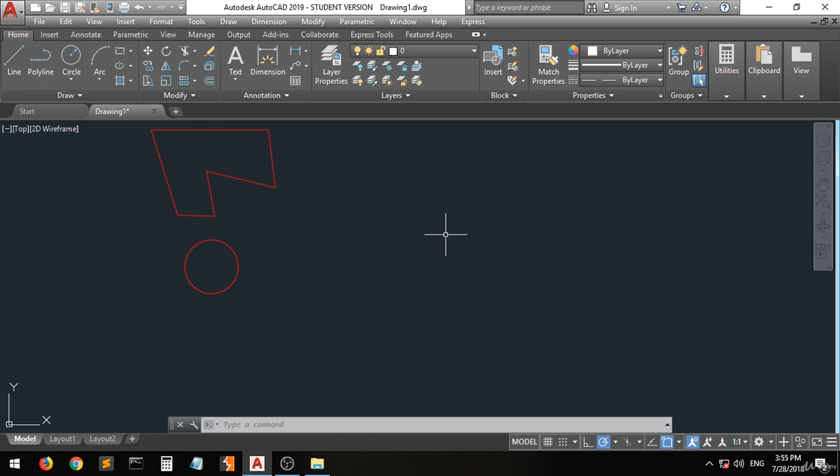So when you create any object, it is drawn with the properties of the current layer. And when you move to, for example, drawing and then create anything, you can see it is created with the properties of the drawing layer.

Let's assume we want to change this circle from this layer to layer 0. What to do? Just select this circle, move here, and select layer 0. And now see, it is moved from the drawing layer to the 0 layer.

See, when you point at this circle, you can see that the layer is 0. When you point at this object, it is in the layer drawing. Very easy. Now let's assume you have this detailed drawing, and you

want to modify some small things on this drawing, and this circle is confusing you and making the job hard, and you want to hide this object. What to do? You have to go to the freeze option. So objects on frozen layers are invisible.

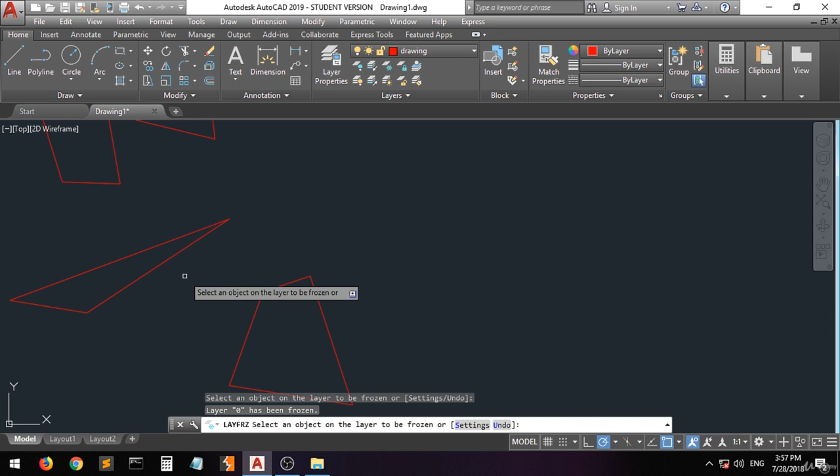And then once you are done, you go to the freeze option, and underneath it you can see thaw all layers, and all the layers that were previously frozen will be unfrozen. Click on it and see all the objects of the frozen layer are now visible for you.

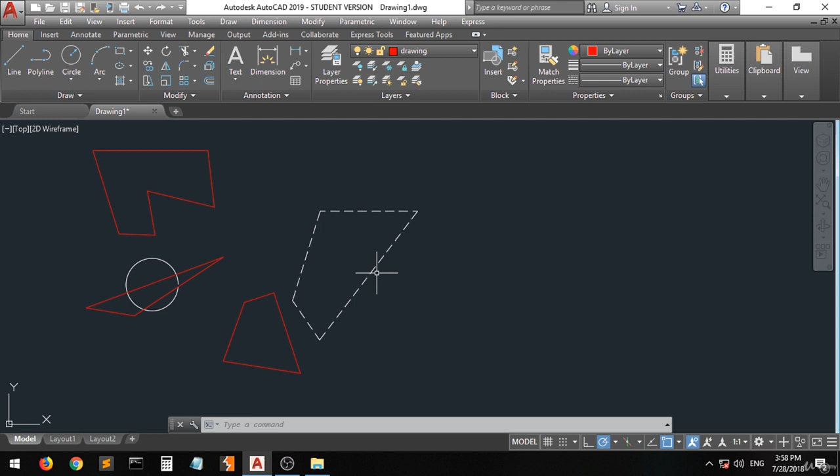Let's say you want to work on small details of this circle, not the other things on this layer. You go to something called isolate. Okay, so once you isolate an object,

you can see that all the drawings of other layers will be hidden. But the one you have chosen will be the only one shown for you. Let's now move it back to the other option, the unisolate. This is the isolate, this is the unisolate.

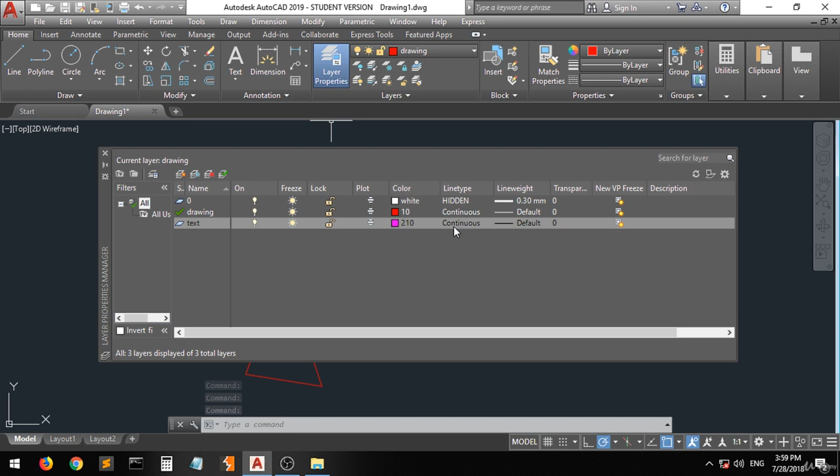Let's create another layer from here, as we said. Go to new. Let's put the text, enter. Let's change the linetype for this. I don't want it to be continuous, so let's make it not continuous. Okay, now we're done. Go to close.

Let's go to the text and create a single line here. Specify start point, the height, let it be in this direction. Now let's just put a circle, double enter as we say, and let's move it from this point here.

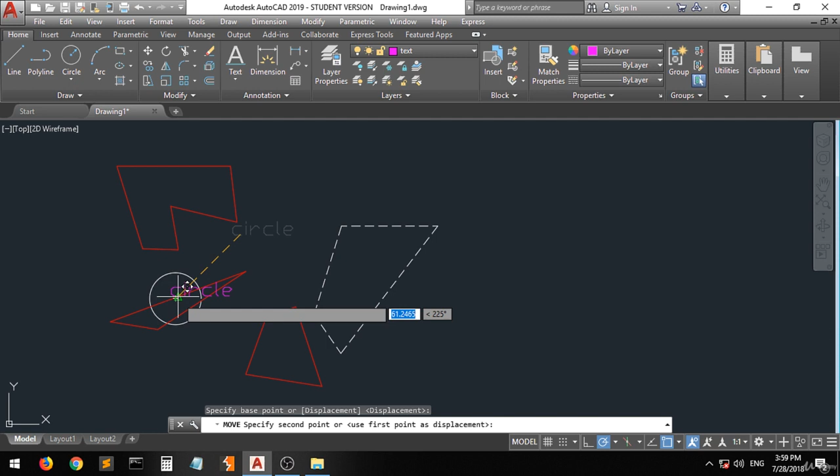Now, once you have complicated drawings like this, you want to work on this circle alone. There's a lot of intersection and it's a bit confusing, and this is where you use the isolate tool. You want to only work on this circle, so you go to isolate

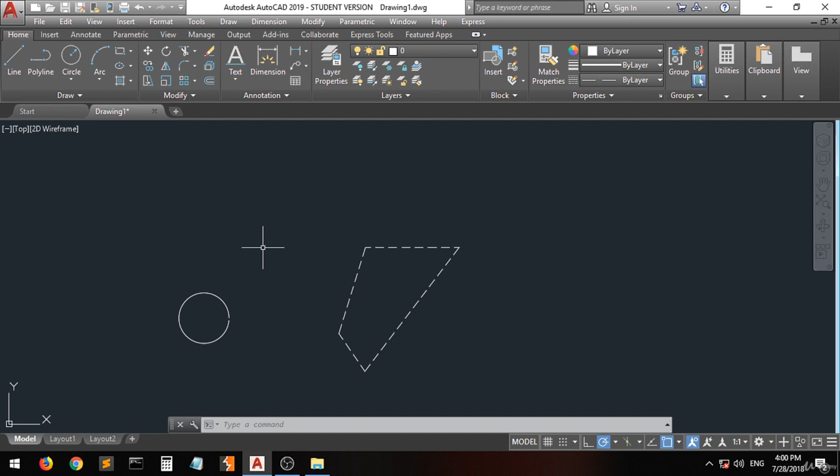and select this circle, press enter, and all the objects of other layers will be hidden. Only the objects on the certain layer you've chosen will be visible for you. Now you can work on the small details you want. If you want to go back, you select unisolate again, and all the layers will be visible.

See, now we have worked on the on/off thing, and the isolate and unisolate. I told you how to use freeze and thaw all. Now let's go to lock.

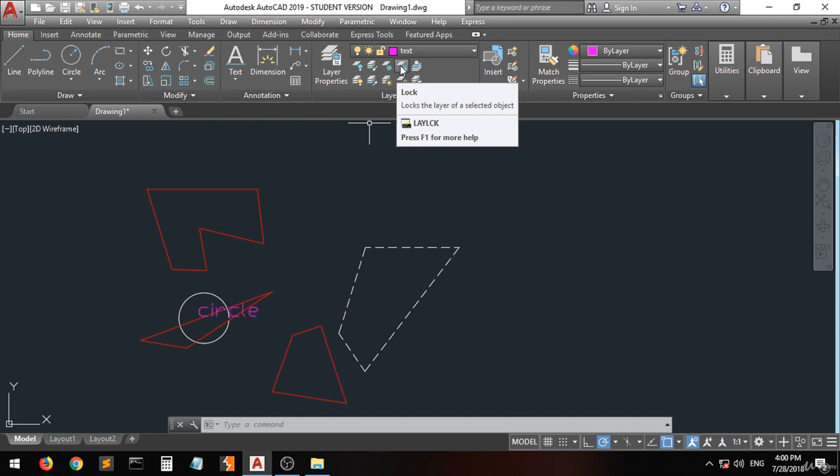What if you want to work on small details, but you want all the objects to be shown for you, because this modification will be connected to each other? So you want all the objects shown, but you don't want to modify them. So what to do? You go to something called lock.

For example, I want to modify this line, but I don't want this circle and this text to be modified. So I go to something called lock.

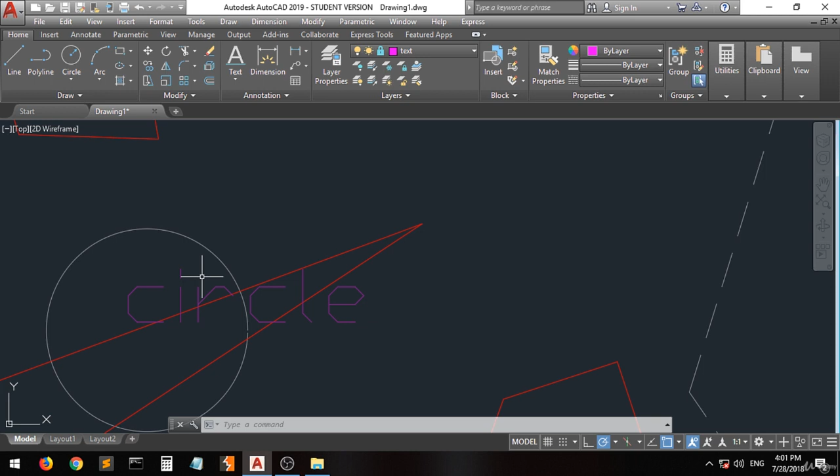I chose this object, and then choose this object, go to lock again, choose this object. As you can see, there's a little bit of transparency for the locked layers. As you can see, it is locked, and now this is locked too. You only can work on the unlocked one.

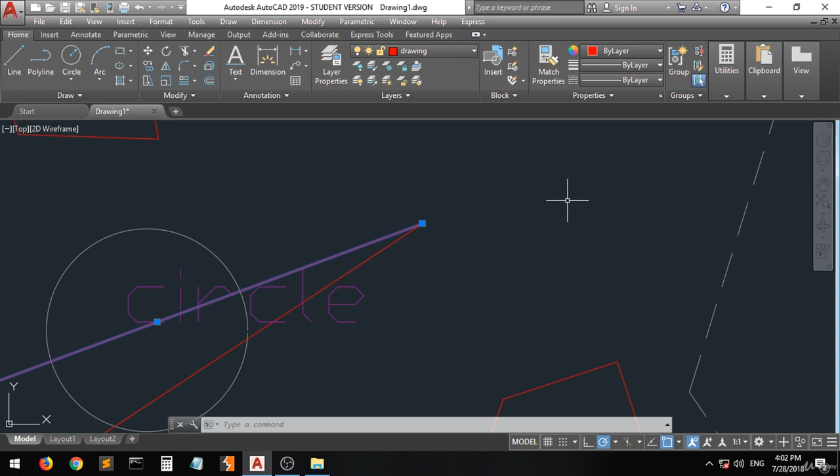Now go to this object, do the modification, change the color - this is something I will tell you right now. Now to unlock the object, go to this, unlock this, and then go to this and unlock it again.

See, very easy. Now, what if you want to change the properties of only one object, not the whole layer, just this object? You go to the properties over here. This is where you change the properties of the drawings or the object.

Let's change the color of this line. Let's make it yellow. Let's change the thickness of this line. Let's go there and change it for this, for example. Now let's go to this layer and change it to hidden.

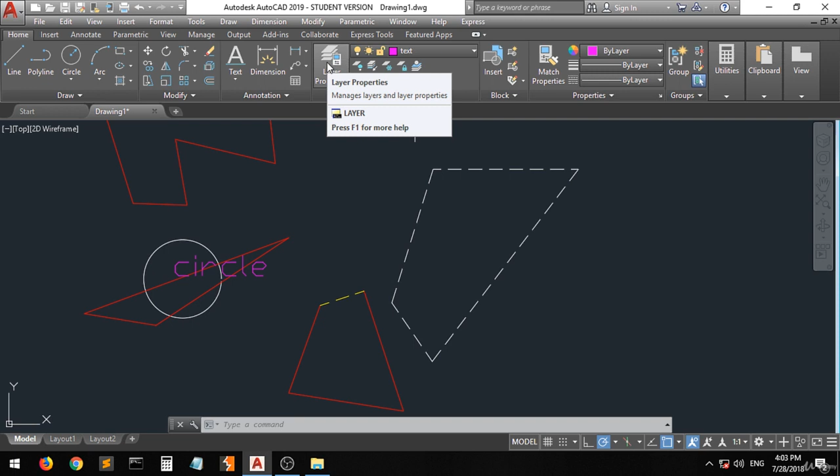Now, as you can see, you can change the properties of a single object on the drawing by going to the properties palette. If you want to change the properties of a whole layer, you go to the layers and layer properties. Okay? And that's it for working with layers and putting things on the layers.